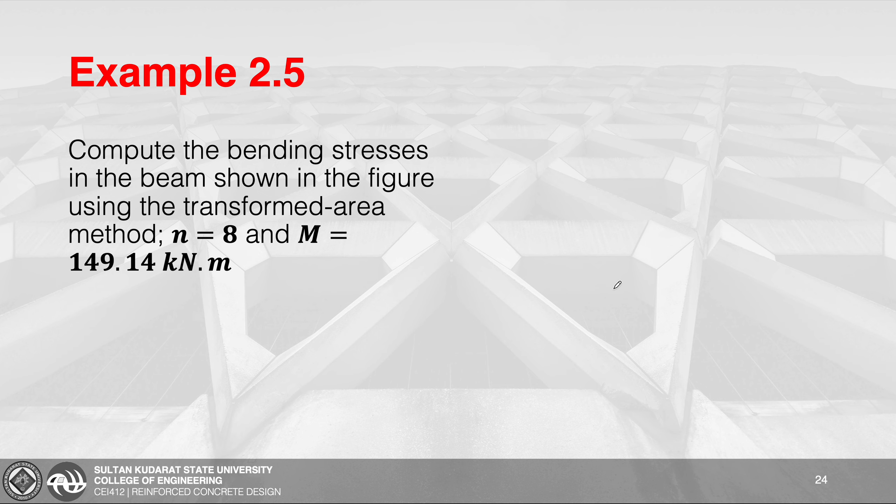So we have example 2.5. Compute the bending stresses, meaning yung F sub C tsaka yung F sub S in the beam shown in the figure using the transformed area method, and n is equivalent to 8, tsaka yung service load moment natin na M is equivalent to 149.14 kN meter. Ito yung dimension, tsaka cross section ng ating beam.

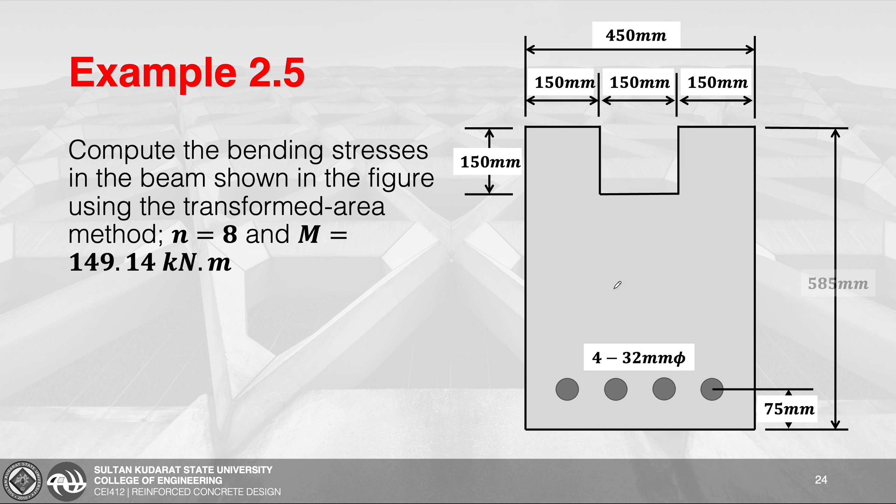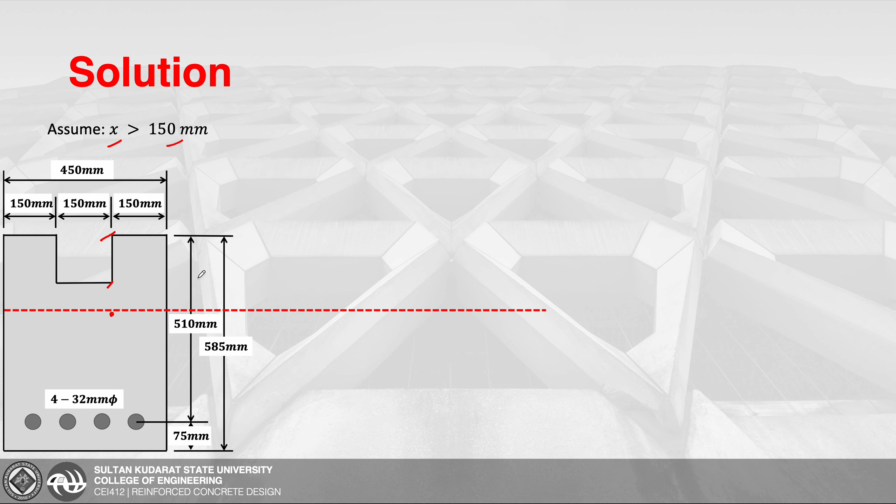So, for our solution, first, mag-assume muna tayo ng magiging location ng ating neutral axis. In this example, we have assumed here na yung location ng neutral axis natin from the extreme fiber sa compression side na X is greater siya sa 150 mm. Take note, yung 150 mm na dimension kanina is galing dito hanggang dito. So, most probably somewhere dito yung magiging location ng neutral axis. Ito yung broken line na yan, yung projected na location ng neutral axis natin.

Then, we have here our construction lines for our guide. After that, ido-drawing natin yung section ng concrete sa compression na side, tsaka yung transformed area natin. So, ito yung distance X. Then, paano to naging 510 minus X?

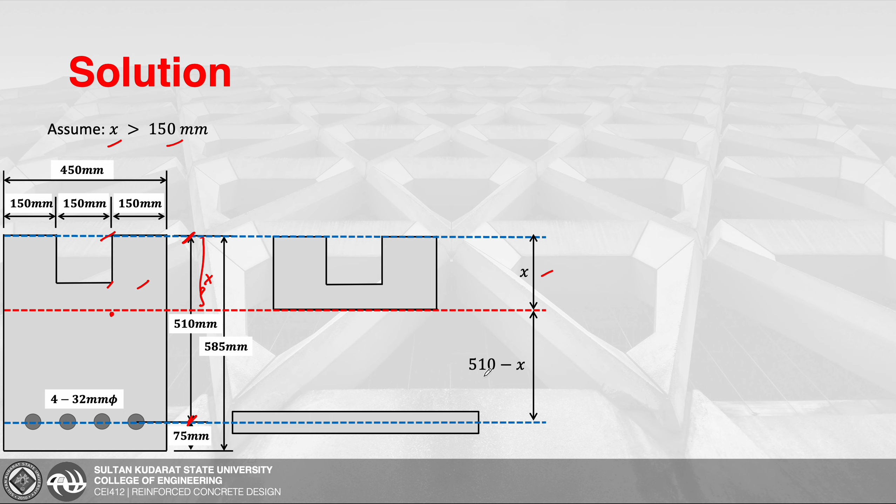Diba, we have a distance na 510 mm from here hanggang dito sa centroid ng steel reinforcement. If babawasan natin yan ng X dito, yung remaining, yun na ngayon yung 510 minus X. Ito naman yung mga dimensions kanina, tsaka yung 150 na distance. Then, yung transformed na area natin. And then, yung missing na dimension dito is X minus 150.

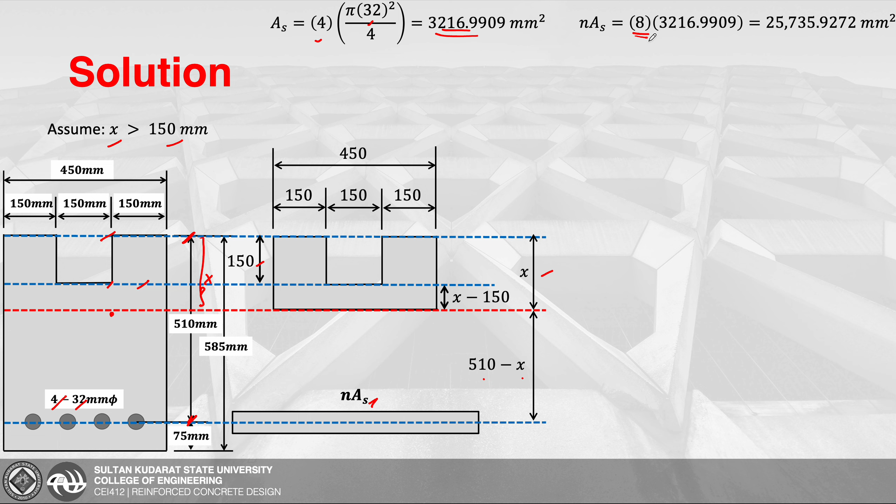After that, solve na natin yung total area ng steel. Since meron tayong 4 na bakal, at saka yung diameter is 32. So, 4 times pi times 32 squared all over 4, we'll get this value. After that, compute naman natin yung transformed area. So, yung na-compute natin na total na steel area, we're just going to multiply it by the modular ratio na given, which is 8. We'll get this value naman.

After that, we're going to take the moments about the neutral axis. So, ito na ngayon yung ating computation. First, kukunin muna natin itong buo na section na to. Yung area nito is equivalent to 450 times X times yung centroid na X all over 2. Tapos ibabawas na lang natin itong hollow na section na to. Yung hollow section natin is 150 by 150. Tapos yung centroid nito hanggang sa neutral axis is 150 divided by 2, tapos mag-add lang tayo ng X minus 150.

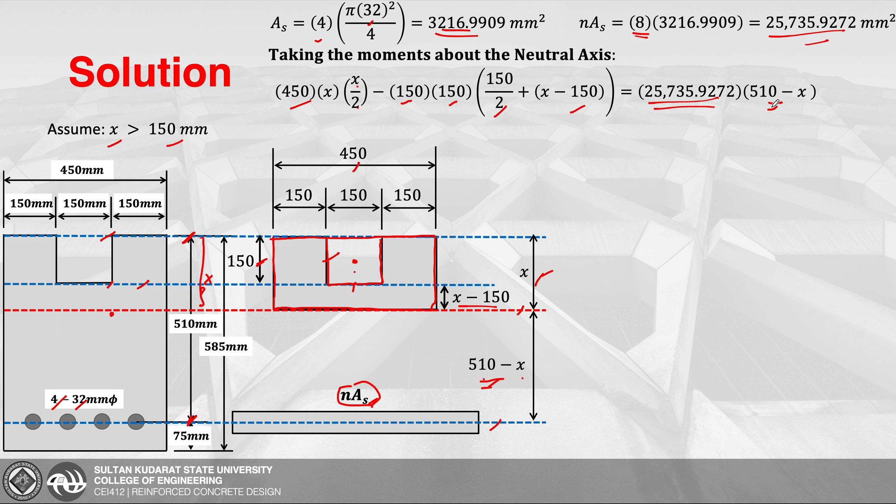Sa tension side naman, we have our transformed area. Substitute nyo na lang, times yung distance nito from the centroid papunta sa neutral axis na 510 minus X. So, using your shift solve na function sa inyong calculator, we'll get a value of 218.3894. After that, i-check natin to doon sa ating assumption. Since yung X na nasolve natin na 218.3894 is greater siya sa 150 na na-assume natin, therefore, yung assumption natin is correct.

After that, we're going to solve naman for the moment of inertia. So, ito na ngayon yung calculation natin. We're going to consider this area, ito, tsaka ito. Yung dimension nito is 150 by X, diba? So yung magiging width natin dito is 150 times yung X natin na distance na 218.3894. I-cube nyo na lang, then divided by 3, meaning transferred na siya ng moment of inertia papunta doon sa edge, kasi nag-coincide yung edge ng concrete natin tsaka yung neutral axis.

Tapos bakit may times 2? Kasi dalawa, 1 and 2. Identical sila or symmetrical. After that, itong portion naman ng concrete natin dito yung i-consider natin. So, yung B nito is 150 times yung height. Yung height nito is x minus 150. So, yung x is 218.3894 minus 150. I-cube na lang, divided by 3. After that, i-add natin.

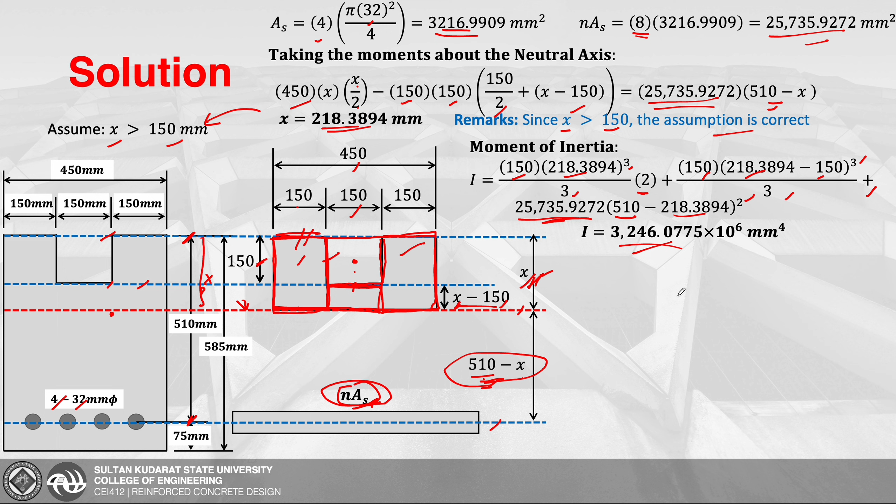Next is yung area, nAs, which is equivalent to 25,735.9272 times yung d na distance na 510 minus x, 510 minus yung x natin na 218.3894, being squared. So, yung calculated natin na moment of inertia about the neutral axis is 3,246.0775 times 10 to the power of 6 mm to the 4th power.

After that, masasolve na natin yung bending stresses natin. Yung F sub C natin is equivalent to M times YC all over I. Yung moment na given sa problem is 149.14, and we're going to multiply it by 10 to the power of 6 para ma-convert ito from kilonewton meter to Newton millimeters. Yung Y sub C natin is equivalent to our X, kasi ito yung distance sa compression side from the extreme fiber ng concrete hanggang sa neutral axis. So, we have 218.3894 divided by yung moment of inertia about the neutral axis. We'll get a value of 10.0338 megapascals.

Next naman is Fs all over n is equivalent to M YT all over I. By direct substitution, yung n natin na nasa problem is equal to 8. Yung M natin, 149.14 times 10 to the power of 6. Tsaka yung YT naman na gagamitin natin is 510 minus X, kasi ito yung distance sa tension side from the centroid ng steel reinforcement papunta sa neutral axis. So, 510 minus 218.3894, divided by yung moment of inertia about the neutral axis. Yung masasolve natin na Fs is 107.1837 megapascals.